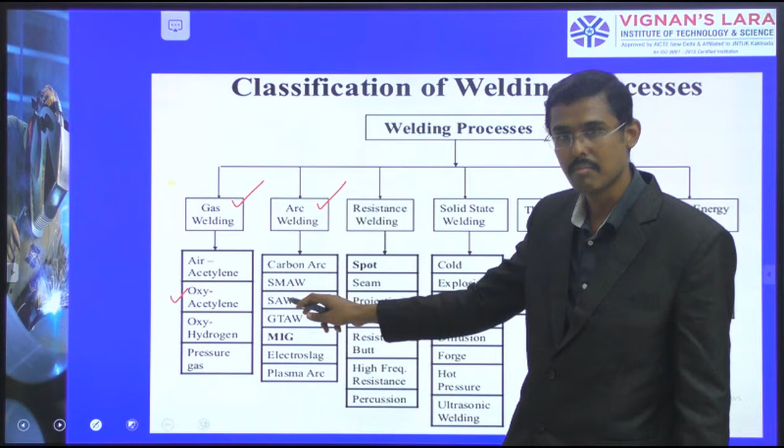In this class we are going to see about the resistance welding processes. Earlier we have already seen the various types of gas welding methods and arc welding methods, including oxyacetylene gas welding, shielded metal arc, submerged arc, GTAW, MIG, and plasma. Now we are shifting to the third part, resistance welding methods. In this resistance welding, there are few categories: spot, seam, projection, flash. These categories we are going to see in today's class, and the remaining part also we have to see.

In resistance welding, heat is generated by resistance heating for softening. I can say this is also a solid state joining process. We are not melting like in the arc welding process, where an arc is generated and the base material goes to melting point. Filler metal is added there, but here we are not adding any fillers, no fume, no flux, no gases, no smoke, nothing is there, just a workpiece. We are going to heat the specific workpiece and apply pressure when it is at a softened plastic state.

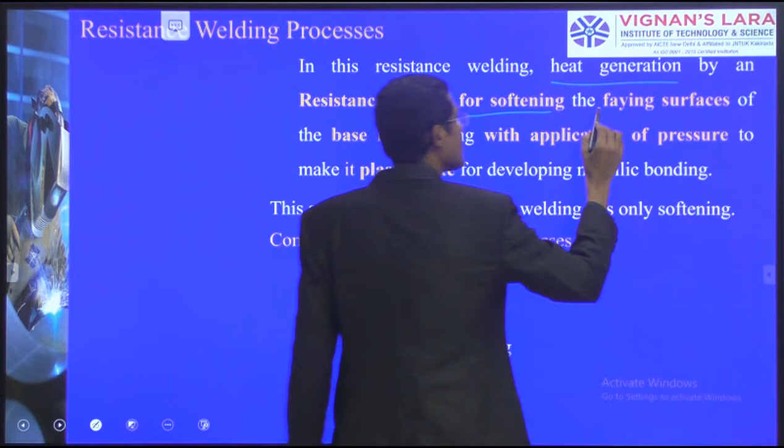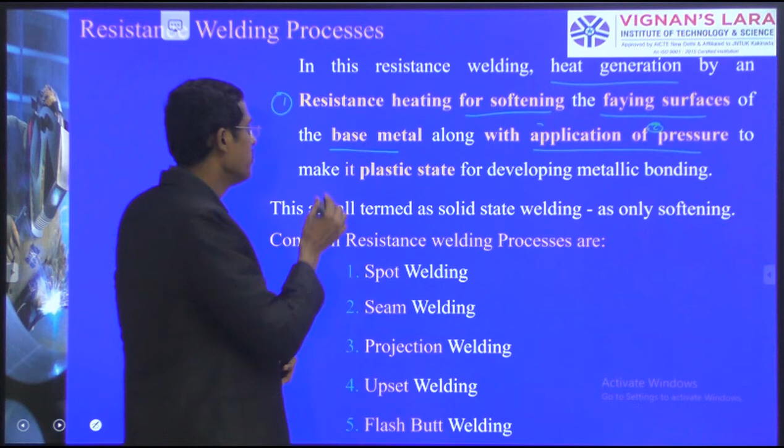Heat generation by resistance heating is for softening of the faying surfaces. It means the surfaces which we want to weld, maybe two surfaces going for a lap joint, these are called faying surfaces of the base material, along with application of pressure. So this pressure and resistance heating combinedly do the work in resistance welding, making the softening of the material, creating a plastic state and developing the metallic joining. At heat, the kinetic energy and movement of electrons causes metallic bonding to occur. This is why it is termed a solid state joining process.

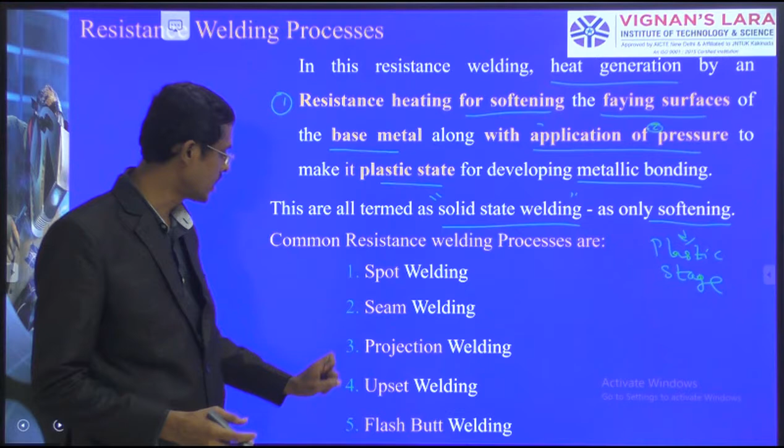As only softening is there, it means the process only reaches a plastic stage. So I am dividing resistance welding into categories: spot welding, seam welding, projection welding, and flash butt welding. Totally five we are going to see in this resistance welding process.

Now we will see generally how resistance welding works for the spot welding process. These are the various things we are going to see. The resistance welding process can be considered as a green process. Why is it called green? It is environmentally friendly, no smoke, no effect to the environment. That is why we are calling it a green process.

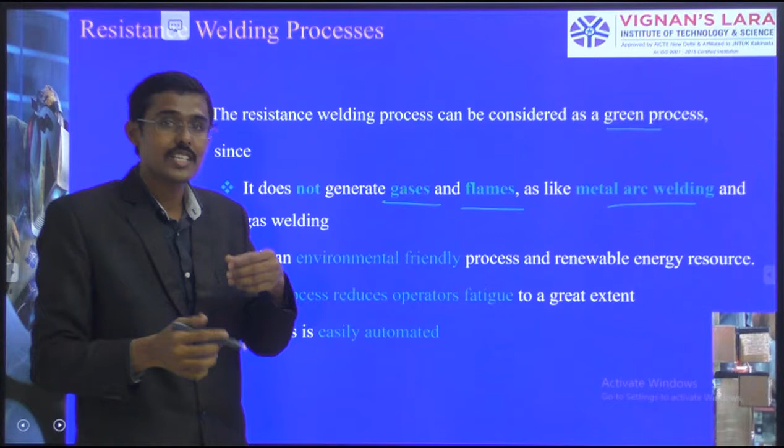It does not generate any gases, flames, and the metal arc is also not generated as in metal arc welding. In gas welding, flames are generated, and in the MIG welding process we have generated arcs, and in SMAW we have generated arcs. But here we are not doing that. It is environmentally friendly.

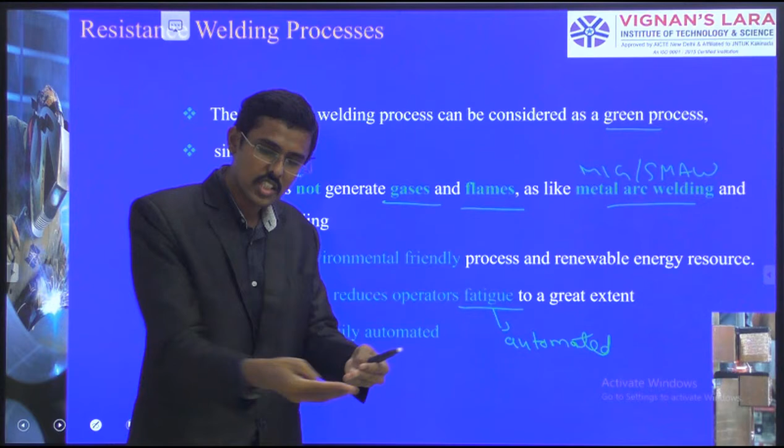Also, this process reduces operator fatigue. Why is operator fatigue reduced? Because it is going to be automated. Machine is going to do the work. We are just fixing the machine, fixing the workpieces, and setting it up. Then automated pressure applying, automated resistance heating, automated semi-solid plastic state formation, automated welding, and the metallic bonding will occur. That is why it is easily automated.

How is heat generated in resistance welding? In arc welding, heat is supplied through the electrical arc. But here we are supplying electrical resistance heating, the material resists, and that resistance generates heat that the material is not able to withstand. This resistance heating makes the material melt partially, and as pressure is applied, it is pushed together and joining occurs at the specific point.

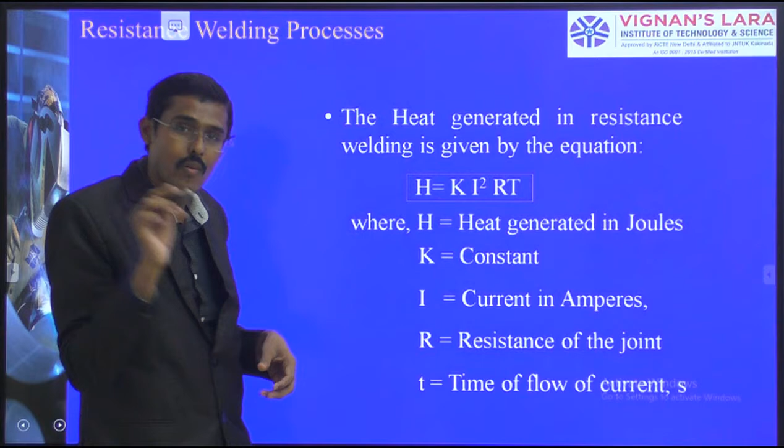The heat generated in resistance welding is given by the equation H equals K times I squared times R times T, where H is the heat generated, K is a constant, I is the current applied for generating resistance over the workpiece, R is the resistance of the joint, and T is the time of flow of current.

So the heat is dependent upon the resistance R, and these constant values are dependent on the workpiece material we are using. How is resistance dependent? With respect to the workpiece: stainless steel has some resistance with respect to current, aluminum has good conductivity with some other resistance with respect to passing current, cast iron has some other resistance, titanium has some other resistance, and copper has some other resistance.

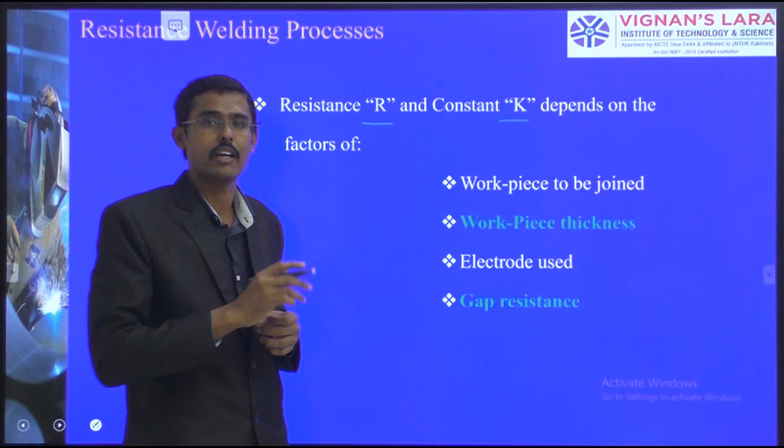With respect to resistance, we consider how much it resists the passing of current. If conductivity is more, less resistance will be there, and less heat will be generated. So you have to pass more current so that heat generation occurs due to flow of electrons. Based on the workpiece material, such as stainless steel, aluminum, or steels, this resistance changes, and also resistance changes with respect to the thickness of the specimen. For stainless steel, if thickness is more than 5 mm, say 10 mm, the resistance increases.

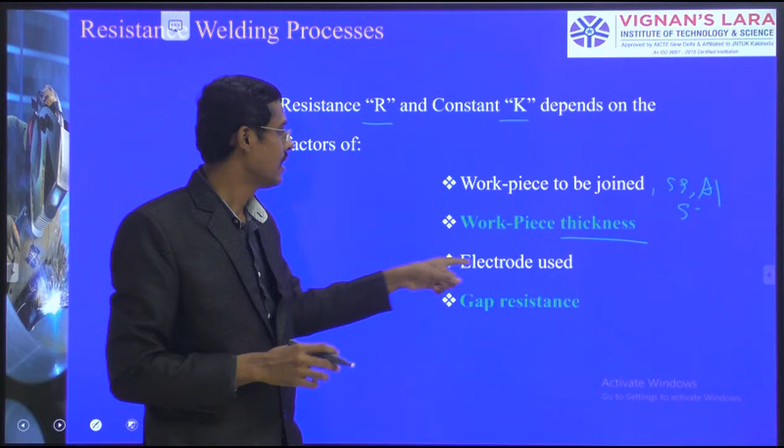What electrode are we using? What gap are we giving between the electrode and the workpiece, or between two workpieces, lap gaps, or the electrode and the workpiece? Whatever gap we are using, that gap also affects the resistance and is a factor in these resistance values.

The resistance welding process can be considered a green process, and the critical variables are the resistance between the two workpieces, and the contact resistance itself, which is affected by the surface finish of the plates. Now we will talk about how resistance values are affected. We know the thickness, the electrode type, and the material being used - depending on these, resistance changes, including contact resistance.

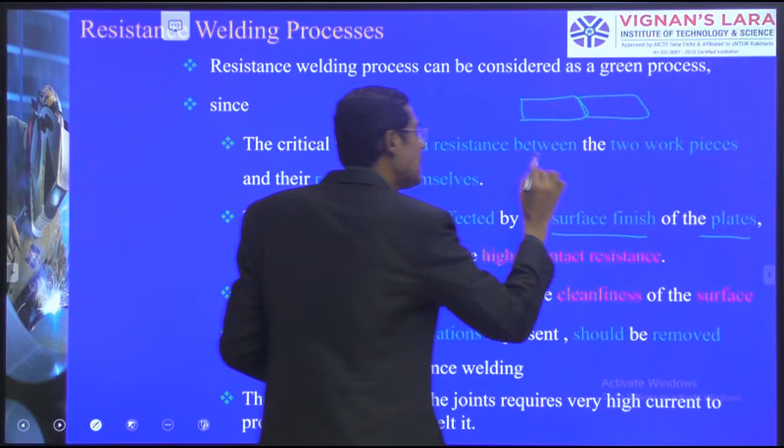Now we are going to join two pieces, maybe a butt joint or a lap joint, to do the welding. So the contact surface needs to be smooth, flat, and in 100% contact. Only then will all zones generate heat properly and a proper welding process occur.

Now consider irregular surfaces - how would they look? Suppose I want to do welding here, with some irregular surfaces like this, and one side has exact flattening. So what happens? When these two surfaces come into contact at certain locations, there is a gap between them. The contact is not the same, surface finish is not good. If the surface finish is not good, contact will not be proper, current passing will not be proper, resistance heating will not be proper, and therefore melting or the plastic stage will not form - welding will not form finally.

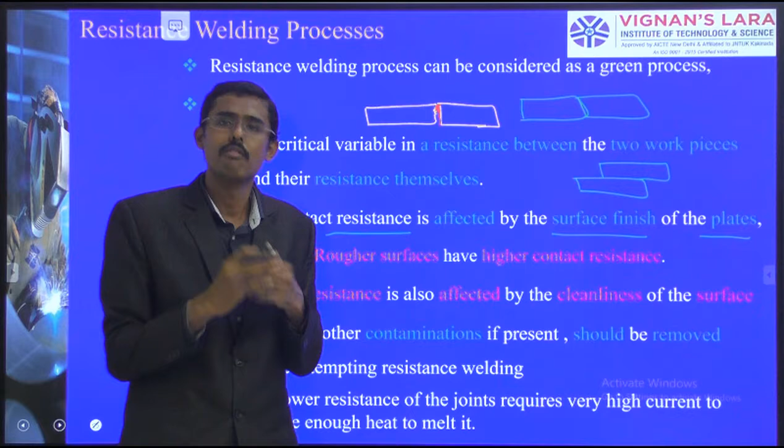Therefore contact resistance is affected by the surface finish of the plates. Contact resistance is also affected by cleanliness. I have talked about 2 points here - one is surface finish, point number 1, and number 2 is the cleanliness of the surface.

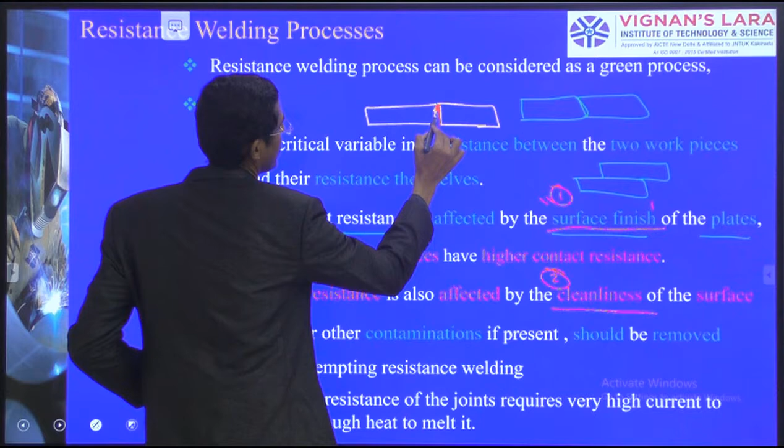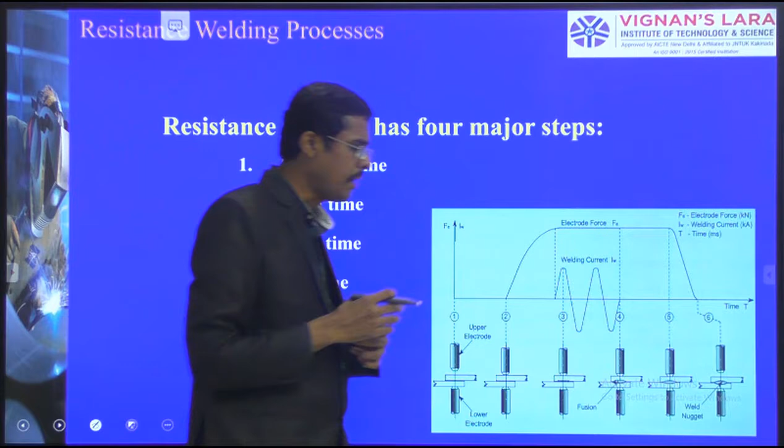Now I am coming to the steps involved in this welding process. Resistance welding has 4 major steps: number 1 is the squeeze time, then the weld time, holding time, and off time. So these 4 are there - one by one you have to see them.

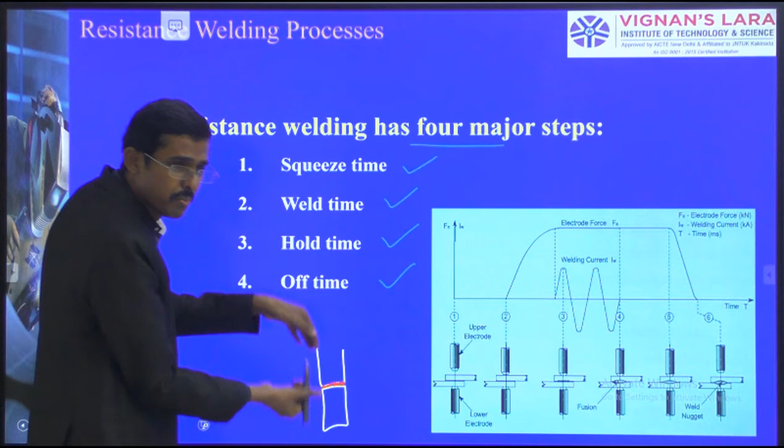The name itself says what resistance welding is. We are going to take 2 specimens in this format, and we want welding here in this location. So what am I doing? First I am squeezing these two - keeping the arrangement and squeezing, pressing them together - then comes the welding time.

What is welding time? Heating is formed, then automatically a plastic state forms. We are already applying pressure here - force is applied. Due to this pressure, this resistance heating, and the plastic state, welding occurs. How long do we need to hold? We hold for a while until it cools from plastic state to room temperature, heating temperature reduces, and then we can switch off.

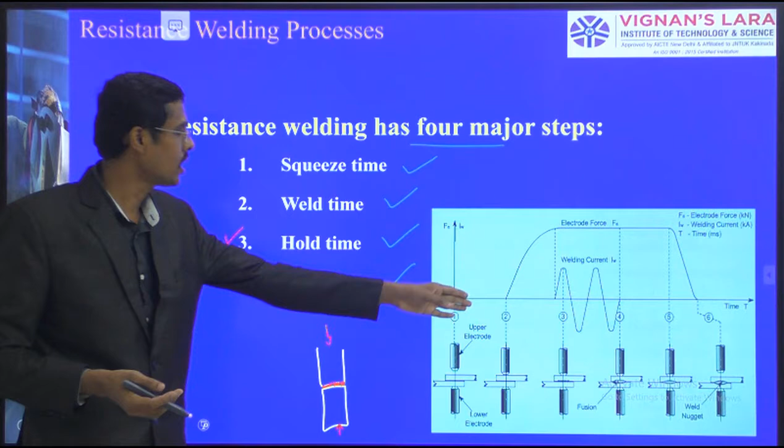That is what the graph shows here. One by one we are going to see these steps. Number 1, the squeeze time - it is the time required for the electrodes to align and clamp the workpiece together and provide the necessary electrical contact.

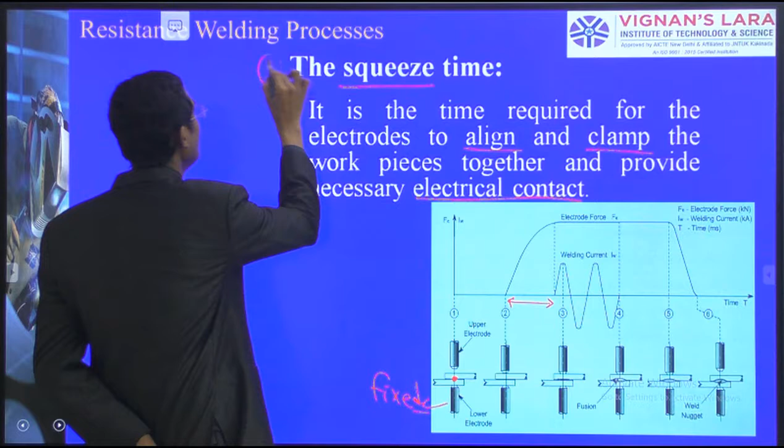See in this picture, this is the lower electrode - let us consider this fixed. And the upper electrode, after keeping it downwards, we keep the lap joint and press to complete the fitting process. Where is the welding done? The welding is done in this location, at the center where the contact occurred - there the welding starts. Now this is the squeezing time. I have started squeezing now - fit up ready and squeezing starts here. How long? The squeezing time goes up to here. This is number 1, the squeezing time.

Squeezing time, then number 2, the welding time occurs. What is welding time? We have to pass the electrical current there, and resistance is formed. Heating is absorbed by the material, and due to that heating, melting occurs.

How long does it last? I am calculating from here to here. Here, the electrical current is applied, meaning the welding current is passed over there. These waves of alternating current we are supplying. So we can say this is the welding time.

Now welding is heated, pressure is applied, force is applied, and welding is done. But at this high temperature specimen, you see, there is no welding nugget like this yet. This is just the starting point, that's why I mentioned it here, but it is not actually formed yet.

From here to here, the welding started. Lightly the welding started, and there it lightly increases our pressure. It is here that the welding is completed.

The weld zone is this one. The nugget, where the force and the point of electrode are in contact, that point is resistance heated and that point is welded. We name that as a nugget joint. A small point-like welding will occur there, that is called the nugget.

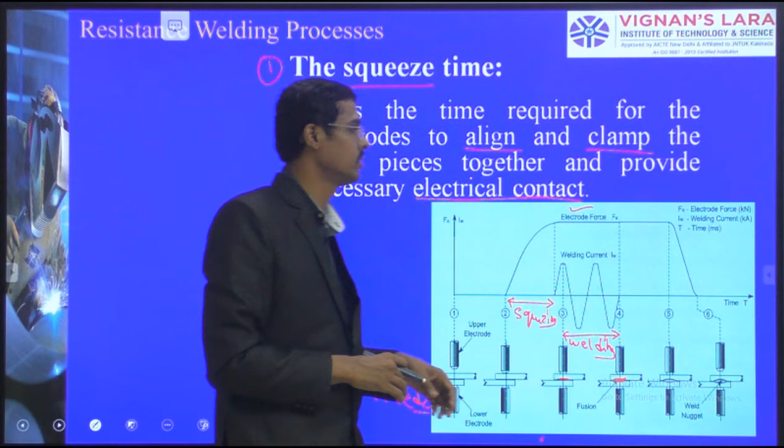So welding is completed, but it is in a red hot condition. It has to solidify and come to room temperature. Therefore I keep holding for the third stage. Squeezing is number 1, welding is number 2, number 3 I am holding here. After this we can put another color because the welding is completed and current is not supplied, so I mark it this way. This is holding.

But pressure is still applied. Now after this, the pressure increased. Welded, still the pressure is there, along with pressure and heating, and then the electrical circuit goes down. Electrical circuit is no longer supplied, but the pressure keeps holding for some time.

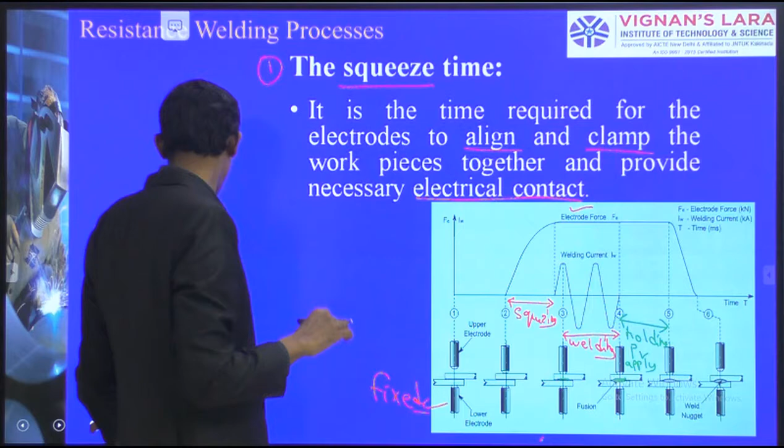Now the holding is over, the material specimen comes to this state. From the red hot condition it comes to a green condition, solidified. Now we can remove the specimen and move to the next point.

Multiple welds will be done. It is an automated system, considered for an automobile car setup, a frame. There we are connecting two sheets and welding them. This resistance welding heating, for sheet material of thickness 3 to 5 mm maximum, we are able to do. In car automobiles we have sheets of 3 to 5 mm, so those sheets can be resistance welded at multiple joint locations.

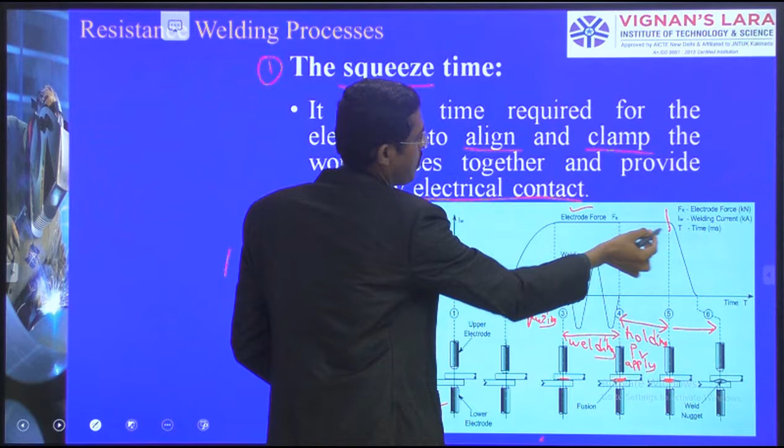So what is this last one? I am calling this off, where the pressure is removed. From up to here the pressure is applied, later the pressure is removed. Here started, pressure continues to apply for 3 stages. Welding current is applied for only one stage, that is the welding stage, and then pressure is applied up to holding. Then pressure is removed, and this is called off.

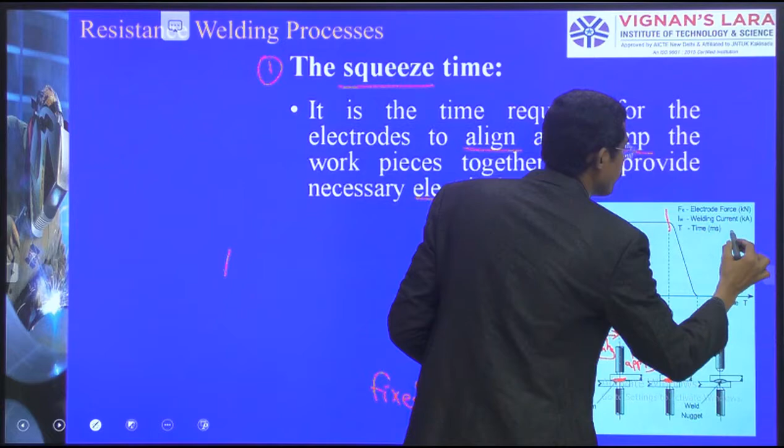It means we are replacing to the next point. Again what happens? There is the graph again. Here, after replacing, the graph goes again, pressure is applied and welding occurs, the graph continues.

This is how the various stages are there in the process: squeezing, welding, holding and off time. So we will read here: the welding time is the time the current flows through the workpiece till it is heated to the melting temperature, and then joining is done.

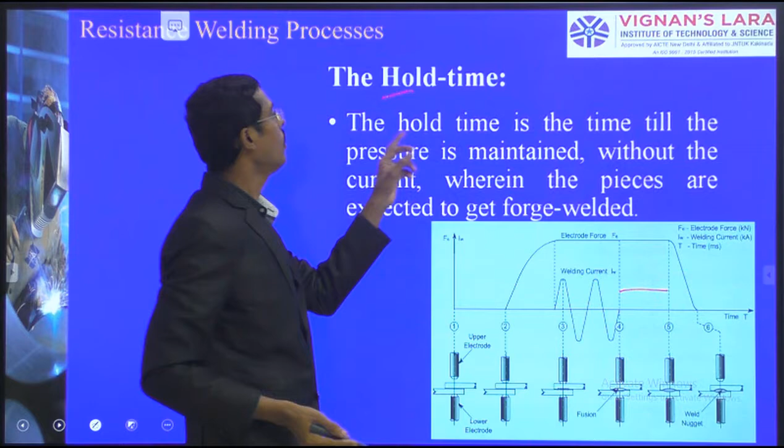The hold time is the time, next to holding. I am talking about the second zone, this zone. Holding time is the time till the pressure is maintained without the current. This point is important, without the current, wherein the pieces are expected to get forge welded, but pressure is applied. Plastic melting is ready, but it needs to be pressurized, then only the metallic jointing will occur. Therefore we are holding pressure there.

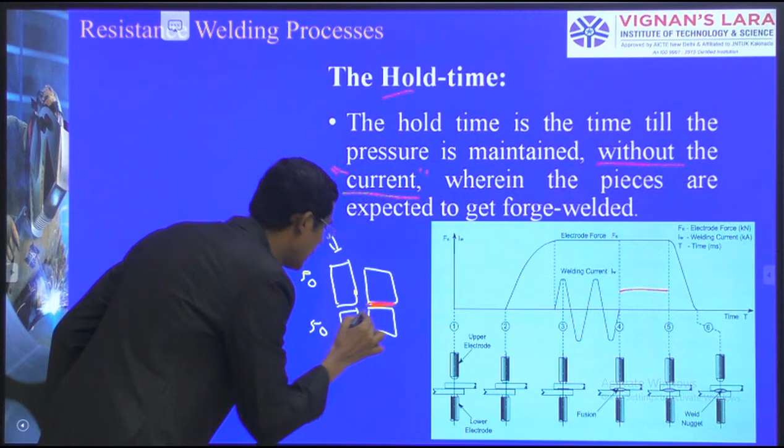We are not having fluxes. For the material we are using, take a specimen length of 50 and another specimen length of 50. After welding, due to pressure applied, the specimen will become shorter, because welding occurred at this point. Therefore it becomes shorter, maybe this side becomes 48 and this side becomes 48, because by 2 mm the pressure plasticizes and welding occurs here. The compression applied there therefore causes size reduction in the workpiece.

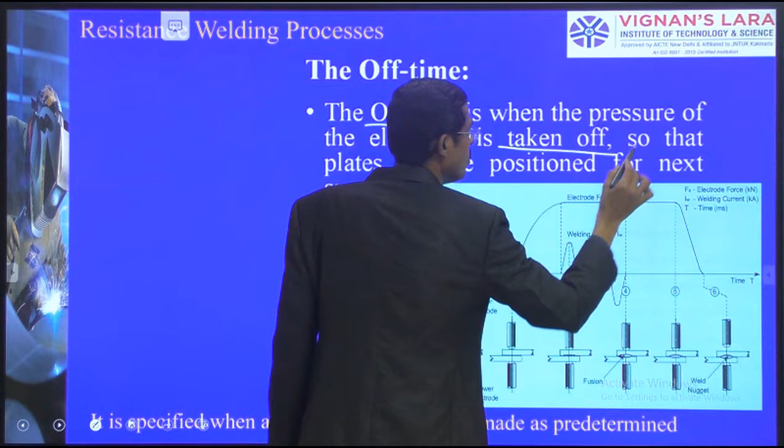No fluxes to be remembered. Then off time - what is this off time? When the pressure on the electrode is taken off, so the plates can be positioned for the next spot.

For the next spot, we are moving the machine to the next point for welding. It is automated. In a minute, we are able to do 30 joints, 30 spot welds. For example, I told you. So what are the advantages in general? Rapid operation. Yes, there are rapid operations. Then it can be fully automated.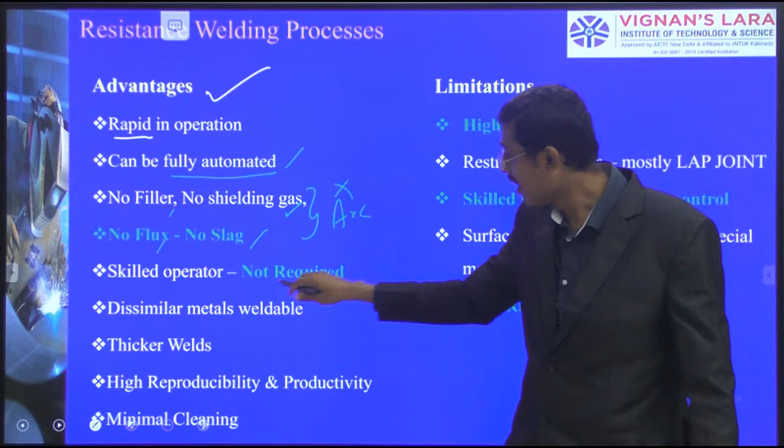Yes, no filler, no shielding gas, no flux, no slag. These words are all related to arc welding, but they are not here. Skilled operator not required. Why? There, the 1G positions, 6G positions, are very difficult. Two-hand handling, TIG welding process, fillers, guns, none of it is here. We simply keep the lap joint, the machine operates and welds there.

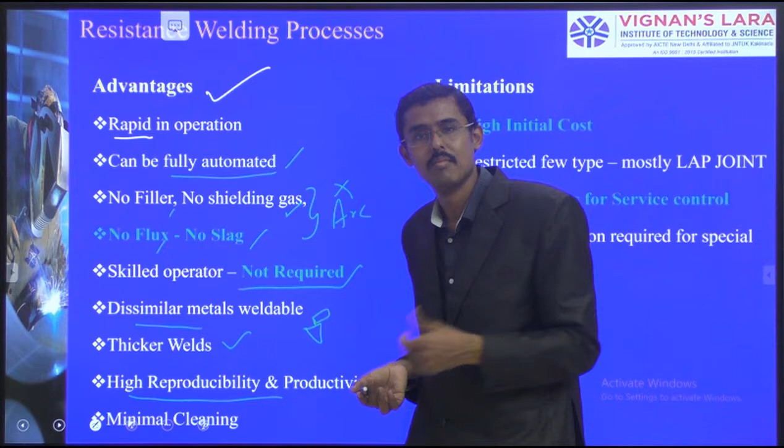Dissimilar materials: in a lap joint, one piece can be stainless steel and the other can be another combination, and we are able to weld them. Thicker ones, high reproducibility: in an automated system, we know what current supply and what thickness. For a 3 mm thick sheet, we apply 90 amps of current, and the same joint will occur again. That is called reproducibility of the same result. But in the manual case, the hand movement and speed are all done manually, so it varies. So we may not get the reproducibility.

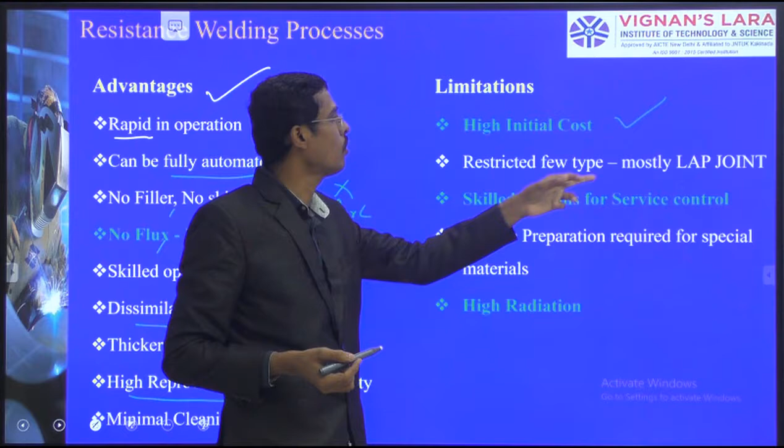Minimum cleaning: there is no slag, fluxes are not there, so cleaning is not required. High initial cost for the automated system. Restricted to few joint types, mostly the lap joint, one over the other, making the joint there. Skilled operators for servicing the machines. But see, skilled operators are not needed for welding. Skilled operators are needed only for repair work.

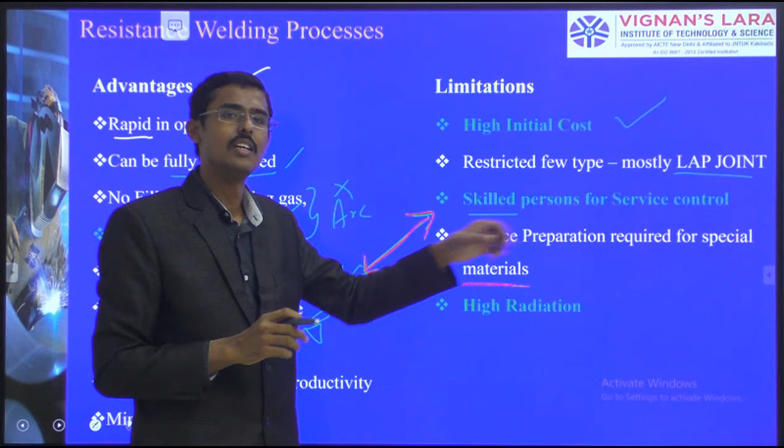That's the point. Surface preparation is required for special materials: surface cleaning, smooth surfaces, contamination removal before welding. And high radiation; sometimes flash formations produce high radiation.

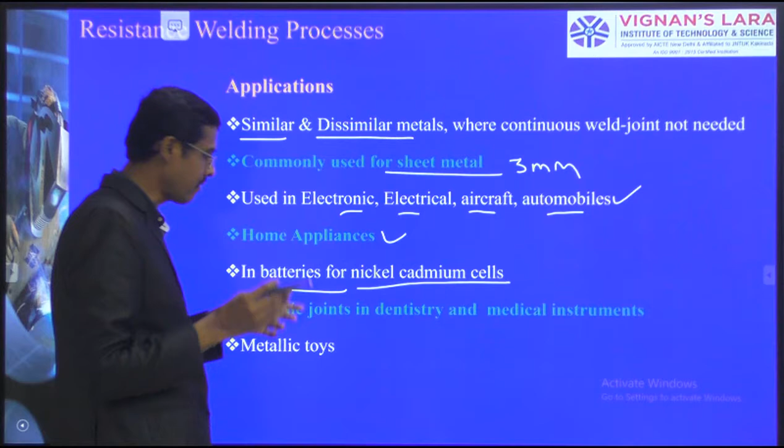Applications: we are able to weld similar or dissimilar materials. Commonly used for sheet metals up to 3 mm. Used in electrical, aircraft, and automobiles. We have told some examples: cars, frames, joining. Home appliances, batteries for nickel cadmium cells, the cell coverings, metallic joints in dentistry, and medical instruments, metallic toys. It's simple: the lap is kept, pressure is applied, heating occurs there, and the joint forms.

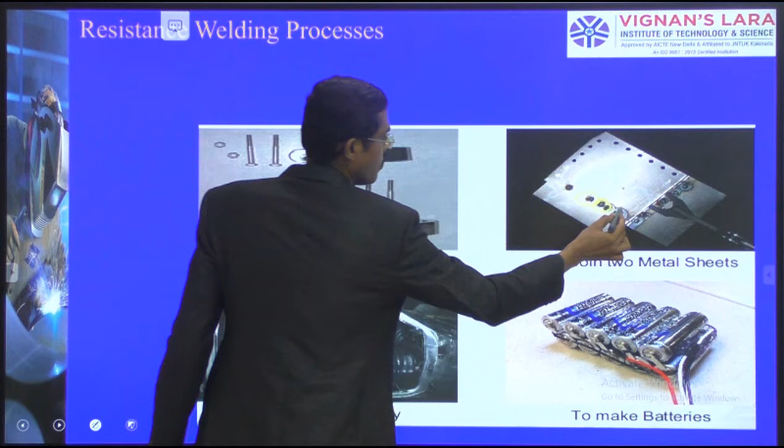Some examples of joints made this way. See, these are the joints where it is possible. These points in the batteries are done by resistance welding, automated welding. See the frames; the frames are done by resistance welding.

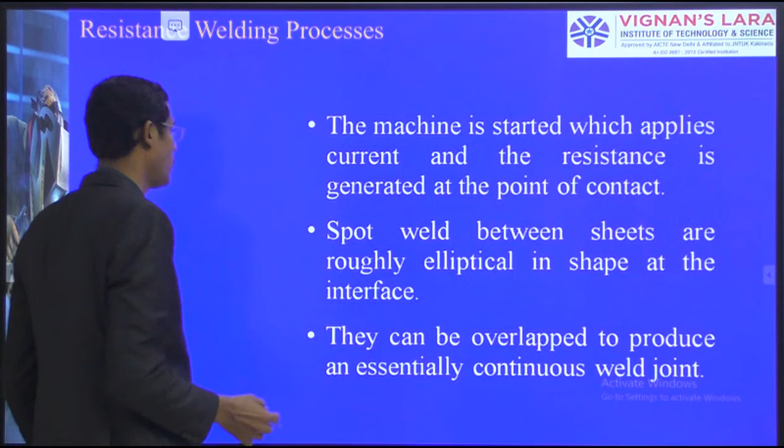Now we come to the concept of spot welding. The individual welds are produced by the momentary application of pressure and resistance in the workpieces. The workpieces are held together under pressure between the anvils. The machine is started, which applies the current, and resistance is generated at the point of contact. I have taken an electrode, and on this side also one electrode, and in between these two I place a plate, and one more plate this way.

So where is the pressure location? The pressure location is this point, this zone. So this zone is going to be welded, not here. The pressure location is where the current flow happens. We attach the power supply here and here, and we supply current. So the circuit is completed, but in between we make resistance heating at that point.

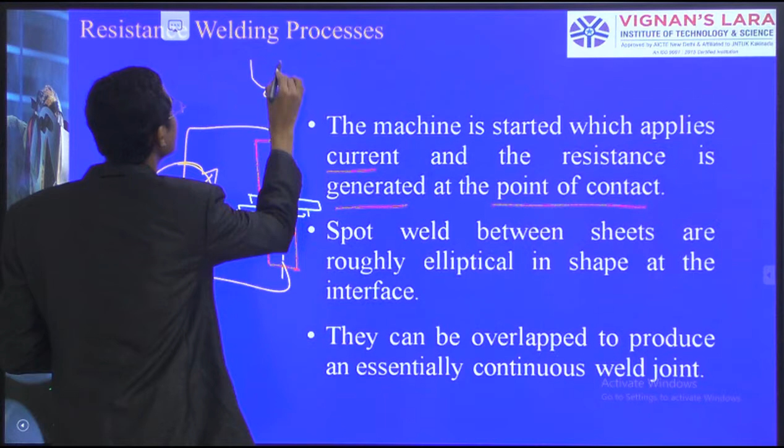If the flatness of the electrode increases, we can do broad welding. If it is sharp, we do sharp welding. The size of the nugget increases as the electrode point width increases. This is the size of the electrode point; when I increase the point like this, the nugget will be like this. So as the electrode width increases, the weld width also increases.

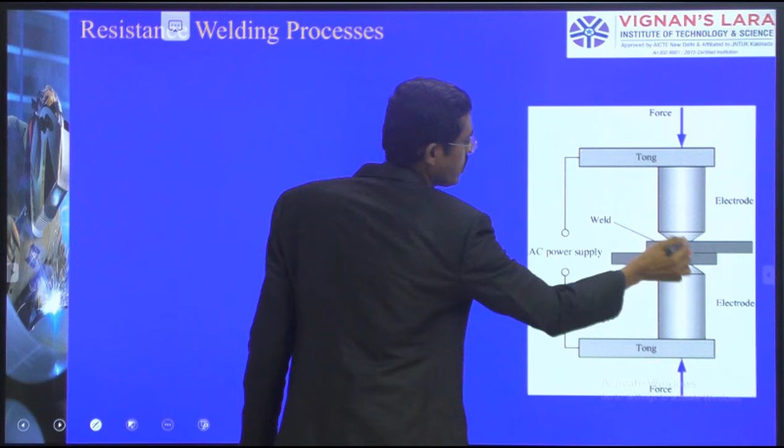So this is the general setup I would like to show you. Here is where the weld occurred. Two electrodes are there. The bottom one, or any one, is fixed, and the other is movable. Force is applied here. Copper electrodes are used for good conductivity.

We are using it for good conductivity there. So this is the setup we have. Up to now we have seen: first stage, pressure applied, welding, holding, and then off time.

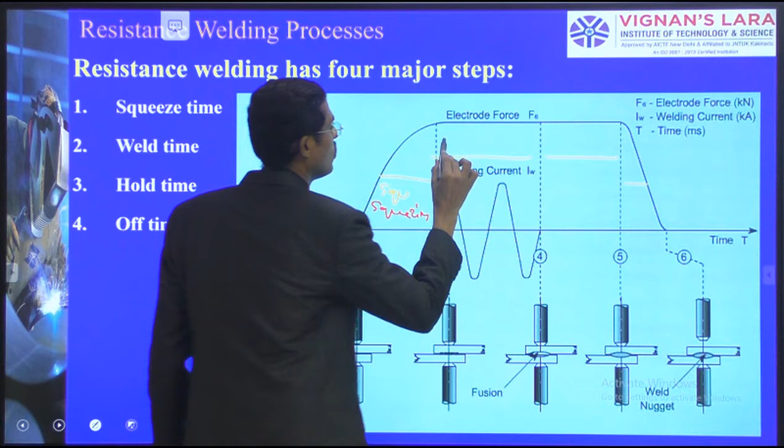We can write it here as squeezing, welding, holding, and it is off. And in the next case also it goes like this. So likewise we can understand the various squeezing, welding, holding, and off times. So some machine setups will be like this.

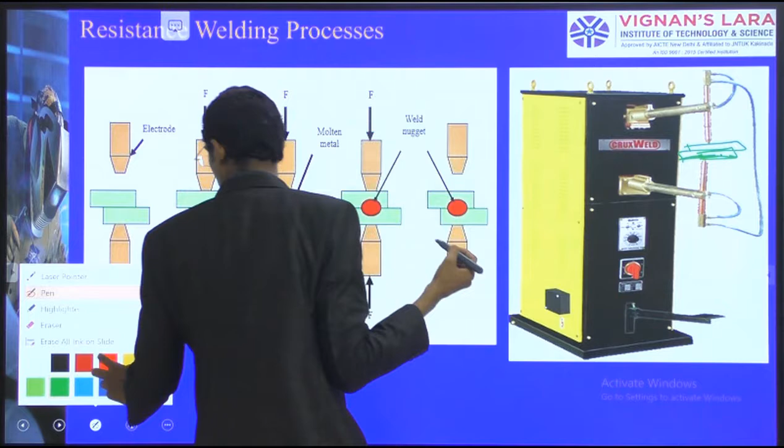See, we have to keep our electrodes here in this location, and we have to weld two butt joint locations. Here the welding will form at this point. So some colored images for our understanding. The workpieces are given, force applied, welding started, solidified, and then it will be removed for the next one. That is for spot welding.

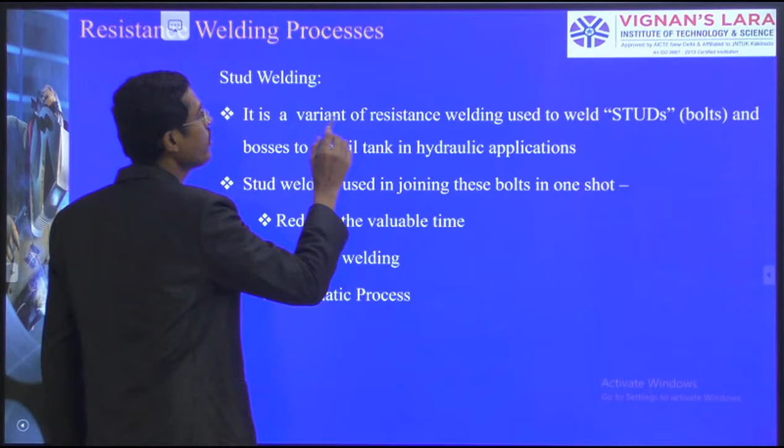Stud welding, we call it. It's a variant of resistance welding used for studs. A simple bolt and a nut are there. I have to make a joint here. So we have a bolt and we are pressing, and it is called the stud welding process. Stud welding is used for joining these bolts in one shot.

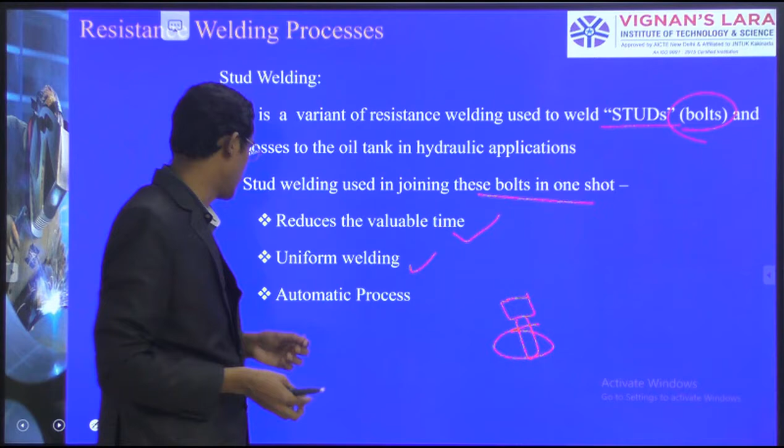It reduces valuable time. It is automated. Uniform welding: with the same parameters, the same output will come. Reproducibility, automatic process. So here I want to show you one small video clip for our better understanding.

We have completed the spot welding. Now we are going for the second one, the seam welding process. Spot welding we have done at one location. What is the seam? We are going to do a continuous roll. Instead of this electrode, it is converted into the roll format. That is what we call the seam welding process.

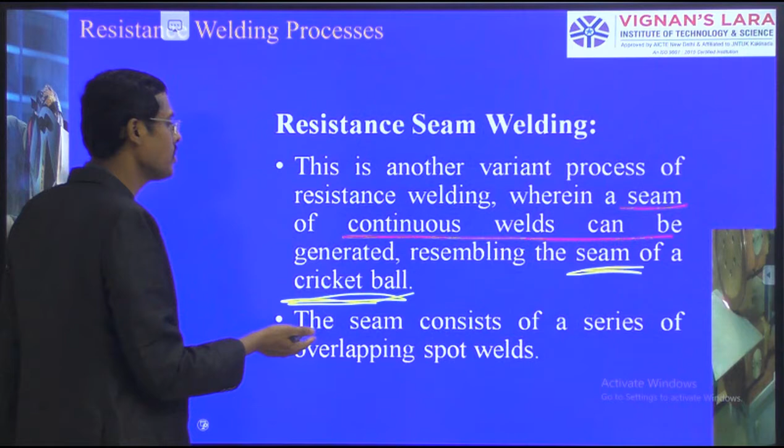This is another variant of the resistance welding process, where a seam of continuous welds can be generated, resembling the seam of a cricket ball. The seam consists of a series of overlapping spot welds. You see, here one spot is done. Here I am doing continuous spots, continuous spots.

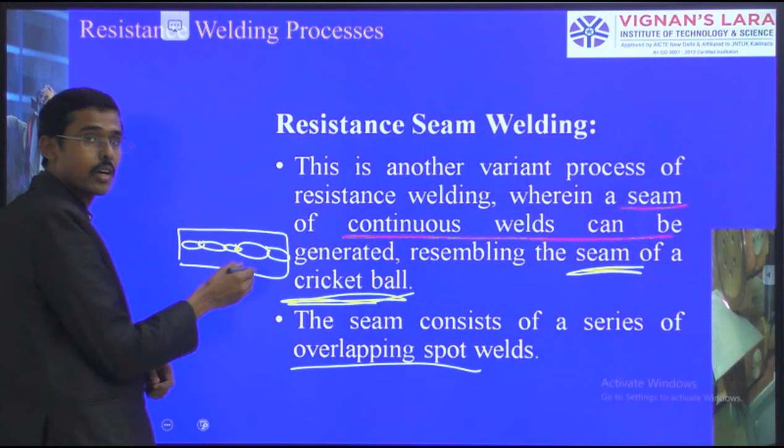So it's like a seam on the cricket ball; we have seen a thread over there. It looks like that, just for example. But it is a continuous spot. It is a spot, a spot, a spot, but when it is done continuously, we call this the seam welding method. Instead of the fixed electrode, we are using a roller for the continuous process.

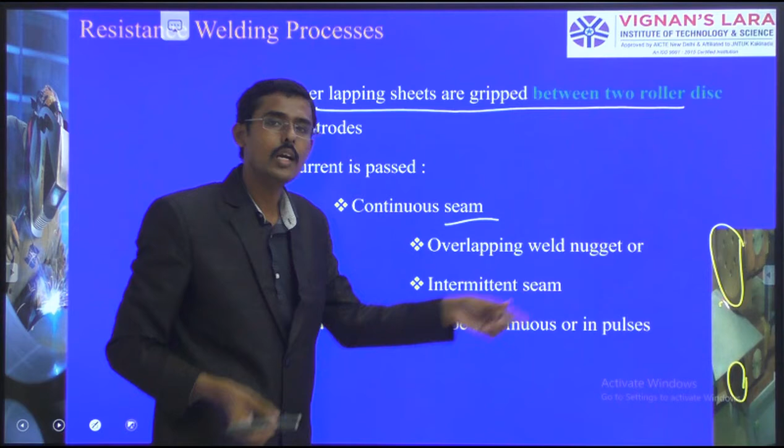So overlapping sheets are gripped between the two rollers. See here, I have taken one roller and one more roller at the bottom, and I have kept an electrode here. It is rolled and it is welded. Current is passed over the roller, a continuous seam is made, with overlapping weld nuggets one over the other.

Intermittent seams can form. We can form overlapping seams, or otherwise intermittent seams with gaps. Welding current may be continuous until the welding is completed; keep on giving the supply. So this is an image of this. See, we have the plate here, and we have to do the welding in this location.

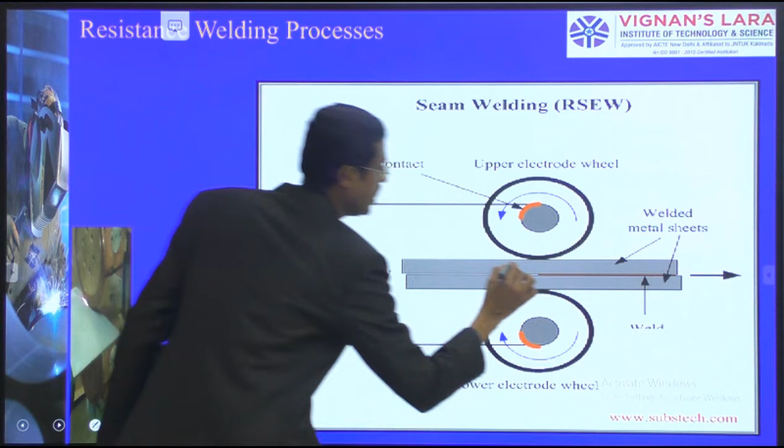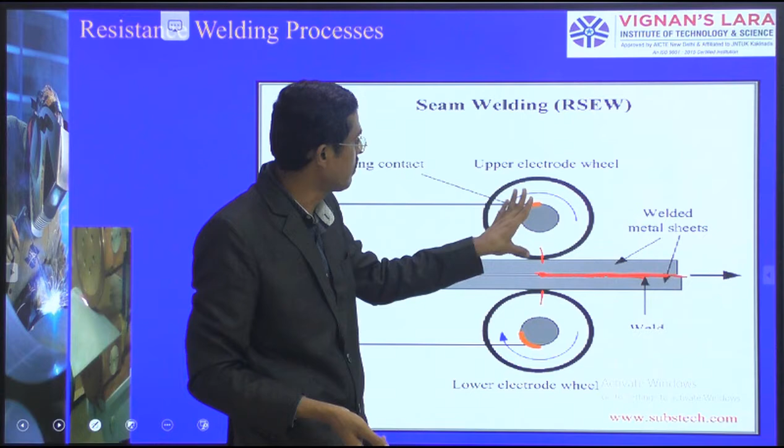In this location I am doing welding between two plates. Two rollers are rotating. They are connected to the power supply, and the resistance heating will occur at this point, the mixing zone, where the heat is generated by resistance, and the welding occurs by application of the roller pressure also, heating and pressure.

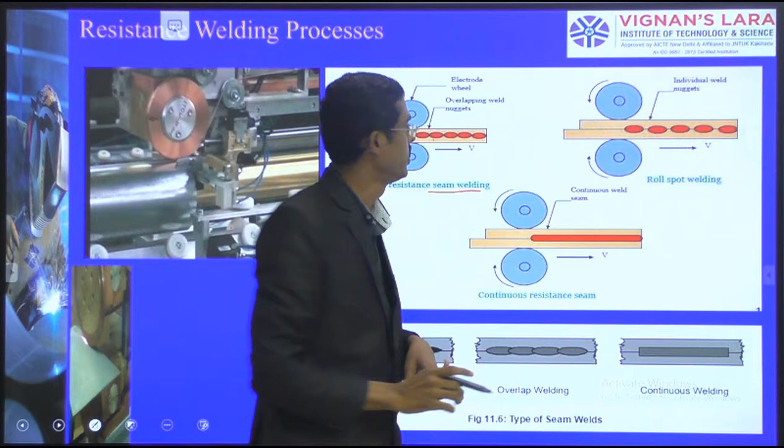So now, you see, the tack welding methods. Here it is a conventional resistance seam welding method, where the seam welding has been done one over the other. And then with the same roller, I am doing spot welding. Here current is supplied, the pulse is stopped. Again the pulse is given, spot welding done. Again the pulse is given, spot welding done.

When the current supply is continuous, it becomes continuous spots, and then it is called seam welding. With the same roller, I can also do spot welding. With respect to current variations, when the current is continuous, it becomes a seam. When the current is not continuous, it becomes spots. So that is continuous resistance welding.

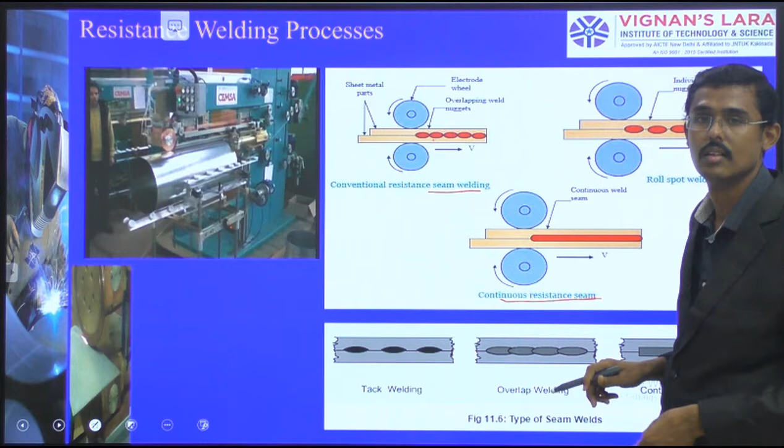So see here, the tack welding. Here I have one, here, here. Then later I am overlapping the welds, one over the other.

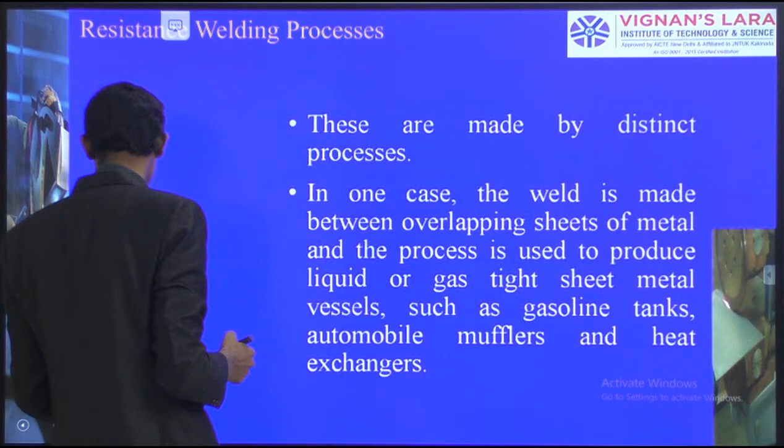So here it is fully a continuous process. We are able to do these things. In one case, the weld is made between two overlapping sheets of metal, and the process is used to produce liquid- or gas-tight sheets. How are we doing it? We are able to generate tightly bonded sheets.

See, a small clip I want to play here. See, they are welding; joining methods are done. How the roller method works: a roller, a sheet, and here the fixed joints are made. For our understanding, I have just played it here.

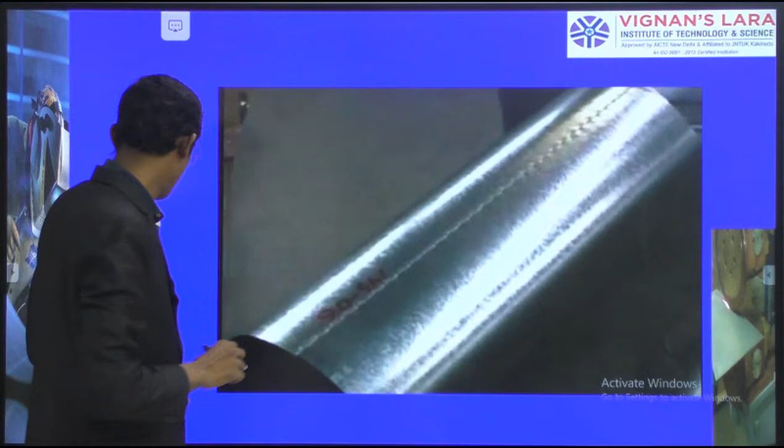So the overlapping of the weld nugget is generally 10 to 50%. For water tightness, I'm giving 30 to 40% overlap. As per the applications, if it is a resistance welded tank or covered tankers, we have to maintain water tightness. There we are using overlapping of 30 to 40%. Otherwise, if it is gas tightness, it increases from 40 to 50%.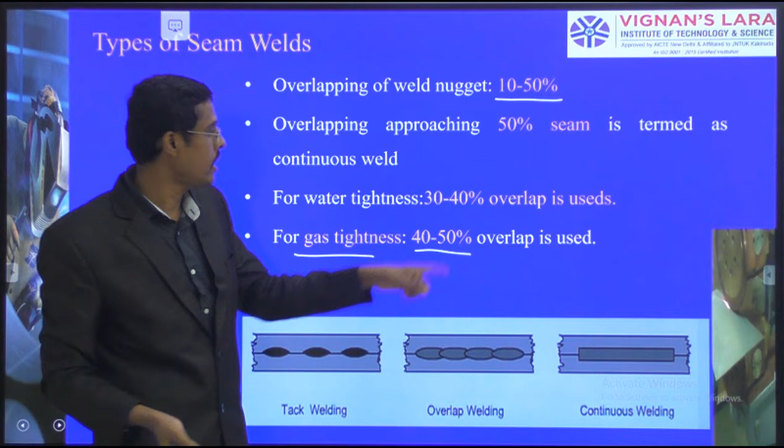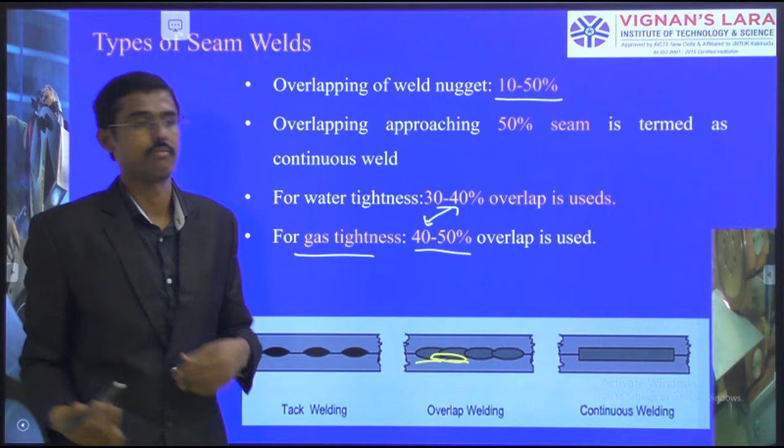There we have used 40%, but here we are using 50% overlapping for tightening, because here actually one weld is there. It is sufficient to start the other weld here, but what I am doing is overlapping from here itself. So how much? 50% I am overlapping over the first joint. So that is how it is for gas tightness.

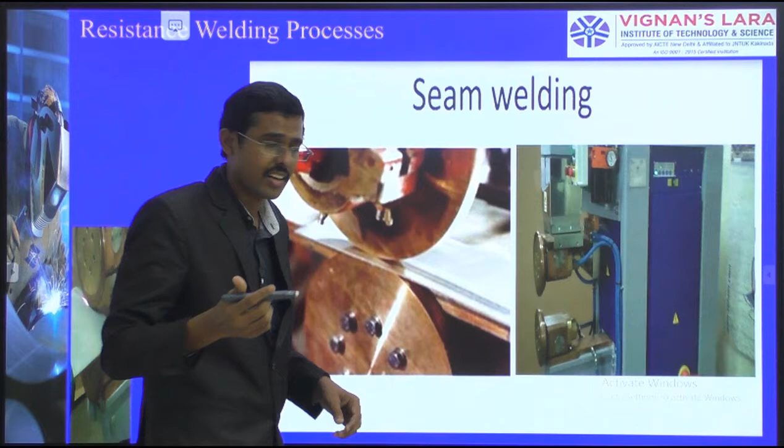So this is tack welding, overlapping, and continuous welding process. So these three categories are there. This is just a sketch showing our machine setup; we have actually seen the actual machine itself. So this is how we can see this welding process. See how the welding has been done here. Generally, two setups are there. We have to run, and then we have to go for the welding.

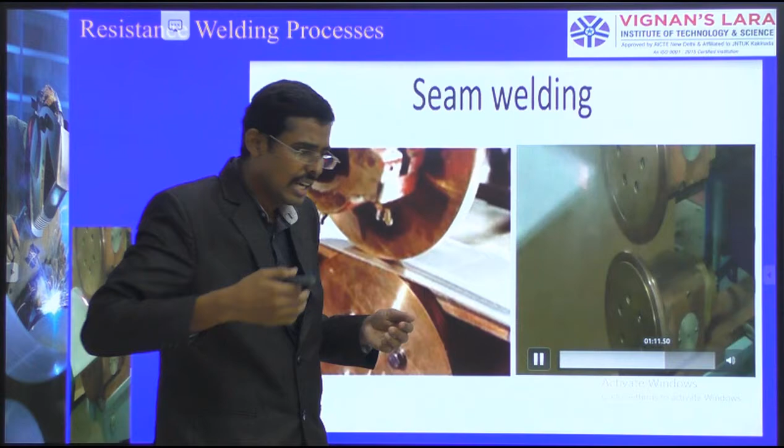So these are two sheets which are kept one over the other for air tightness or water tightness, and we are welding. See how resistance heating is done here. In immediate time, we can go for a long run. In arc welding, what happens? Electrode changing, current changing, manual process, defects come; there is nothing like that here. See, a simple rolling process which generates the weld.

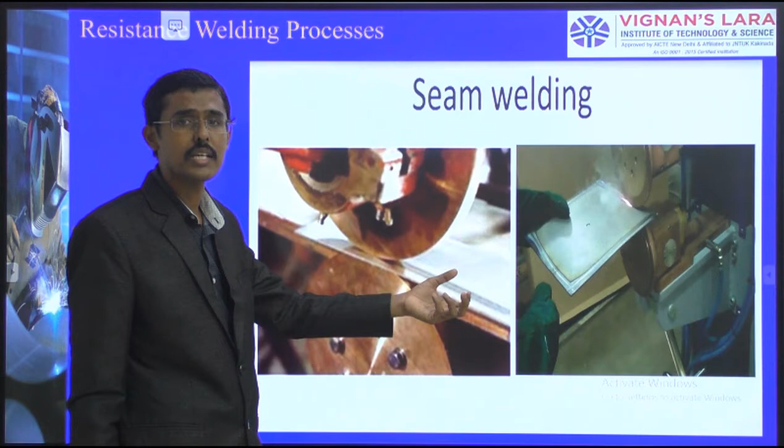So it's very simple. Now they will show you that after filling, for air tightness or water tightness, we can use this setup. See how they are bulged. They are used for tightening. So these belong to seam welding methods, and this has some types.

In seam welding, I am dividing this into three categories: lap seam, mash seam, and metal finish seam. What are they? Here I have kept two pieces and I am supplying the welding here. Welding has been done. This is lap, one over the other. And next one, mash seam welding. So how am I keeping the setup?

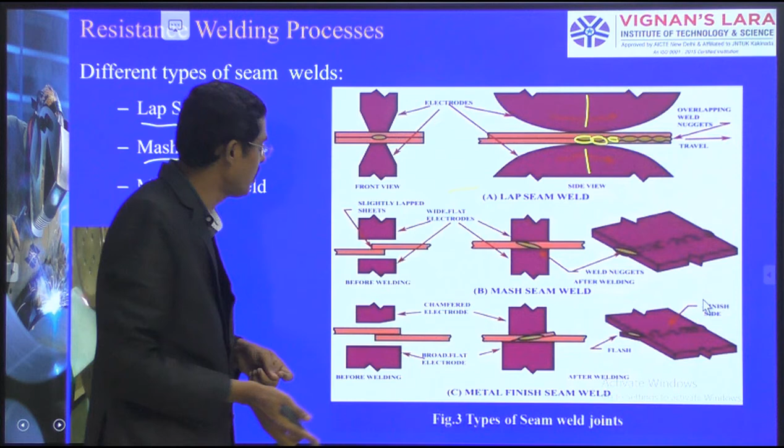You see, two pieces are kept like a lap, but there is a small crossover there. So that makes the mash seaming; a meshing happens. And then similarly, there's a small change in the die. It is not flat, but slightly inclined. So a small projection will happen like this, and we call it metal finish seam welding. So these are some of the types we have to understand.

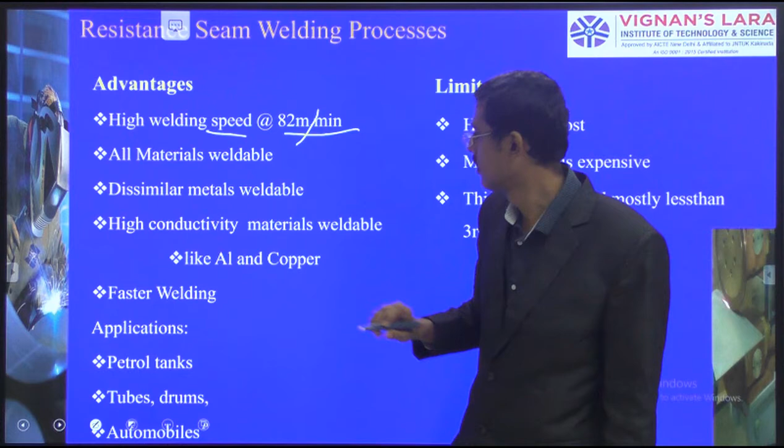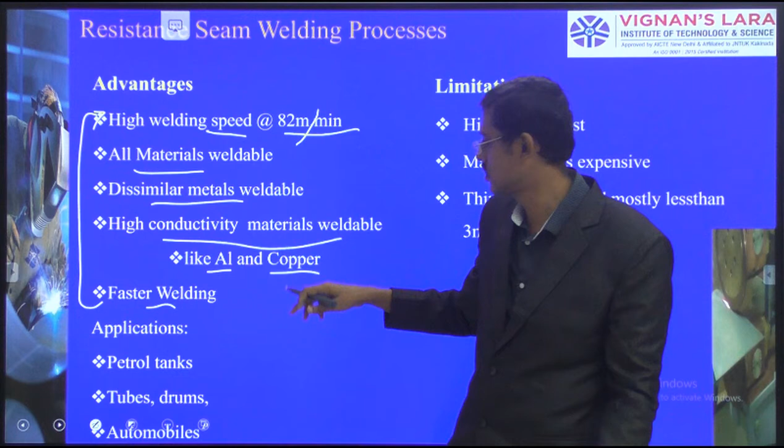So what are the advantages of seam welding? High welding speed, at 82 meters per minute. All materials can be welded, dissimilar metals, high conductivity metals like aluminum and copper, faster welding. We have just seen the video: a roller moving the object, continuously welding. 82 meters per minute is a lot. Applications, what are they?

We can use it in petrol tanks, roofs, and tubes or pipes can be welded. Two joints, the roller, and we keep on welding. Tubes and drums, and in automobile industries.

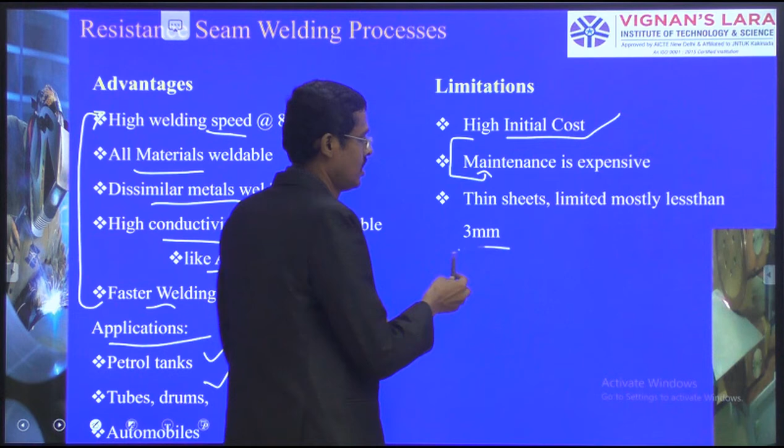So what are the simple limitations? Initial cost is high. Maintenance and service cost: if the machine is to be serviced, this increases. Limited to thin sheets, less than 3 mm. In the machine, we have seen sheets and circular tubes and pipes are very thin; 3 to 5 mm we can weld. For more than that, we have to give more current, and other difficulties will come, distortions also.